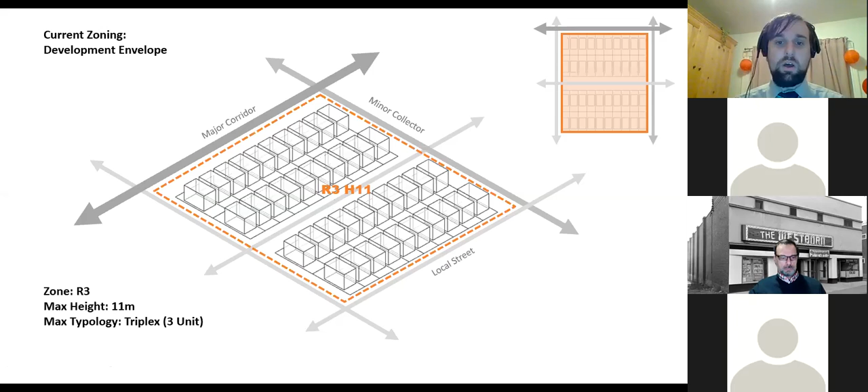So what that hypothetically means is, regardless of where you are, you can build a 3-story triplex according to the zoning, and it could hypothetically look like this. This is essentially showing what that zoning envelope is. You can see there that there's no regard for context.

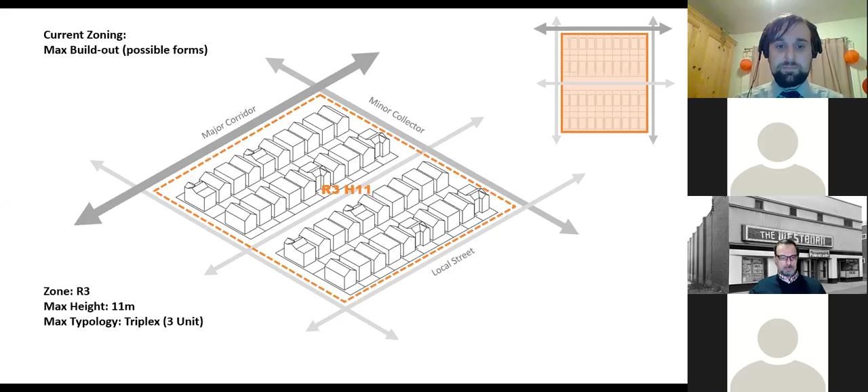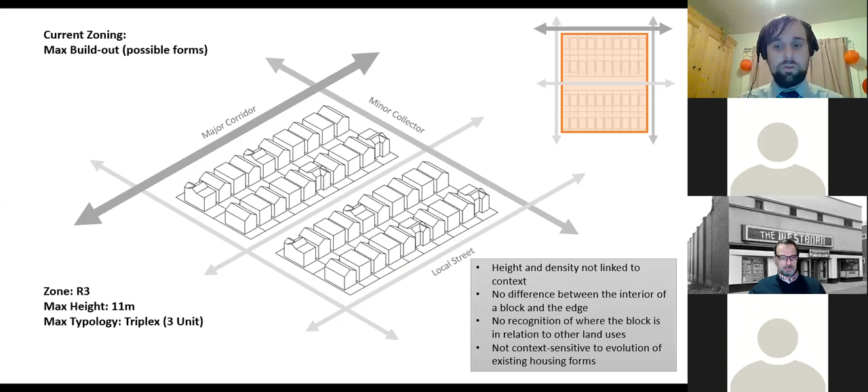It's possible that there might be some specific changes to the built form building by building. You might see a bit of a peaked roof, but generally speaking, regardless of the context, it allows a 3-story triplex. So again, presently, no regard for context, no difference between being mid-block or towards the corner of a block, no difference whether you're on a significant major thoroughfare like Churchill or a local street.

So there's no regard for context there. So the major principle is essentially to concentrate the highest level of density towards edges of the neighborhood and major streets, with lower density and height in the interior.

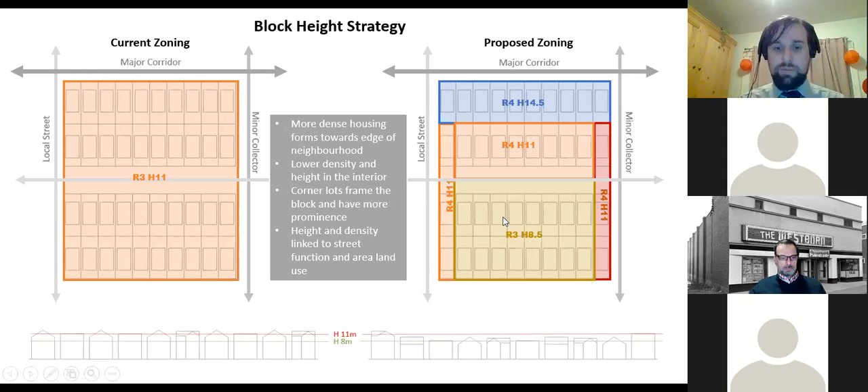So this is essentially what that model is going to look like, and I will walk you through that. Very generally speaking, if we look at that same area again, this is what you'd get. Highest level of heights towards Churchill Avenue, going down as you go to other major streets such as Byron, as well as on the corner lots and areas like that.

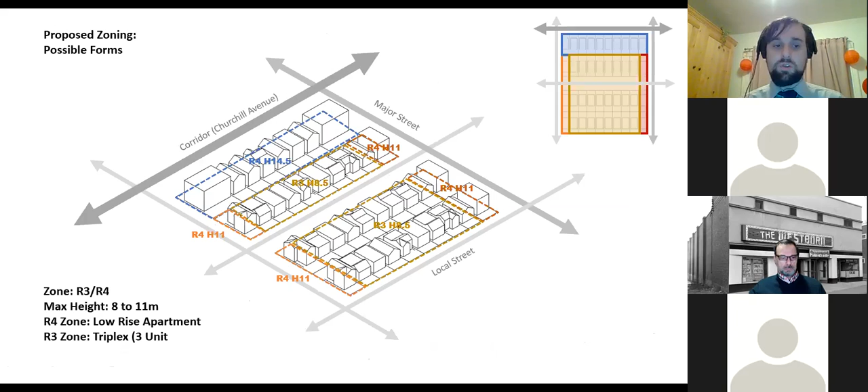And finally, when you're in the interior of the neighborhood, it would be expected to be smaller, less dense two-story forms. So again, this intends to actually take that context into account. A three-story building mid-block is not going to fit as easily when compared with that sort of thing on a major street such as Byron or Churchill. There is context taken into account and better recognition of essentially where you are and what's around you.

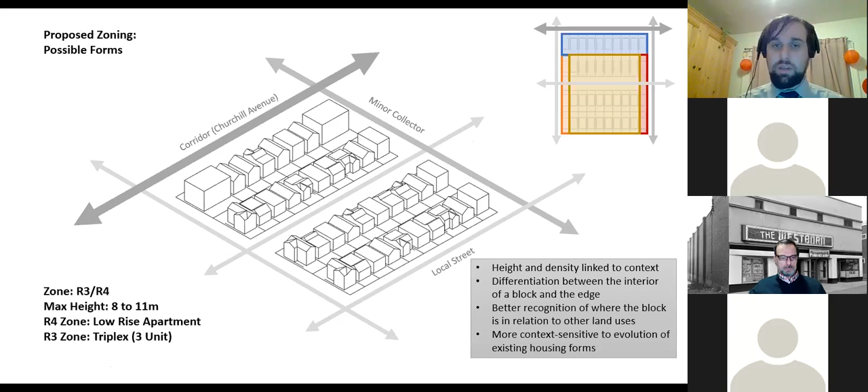So what I'm going to do is essentially walk you through each of the key areas we look at, the principles behind what we're proposing, and the actual zoning regulations that come from that.

The biggest important subject is density. It's an appropriate and desirable thing that can bring many good things to a neighborhood, like retail and necessary services such as parks and transit. But when you insert it, it's important to take care of the quality of life in that design, both for existing residents and for new residents.

When we look at major streets, we'd be zoning streets like Churchill and Byron to allow low-rise apartment buildings. On Churchill Avenue, being the most major street, that would permit up to 4-story development in general, whereas on Byron Avenue, up to 3 stories.

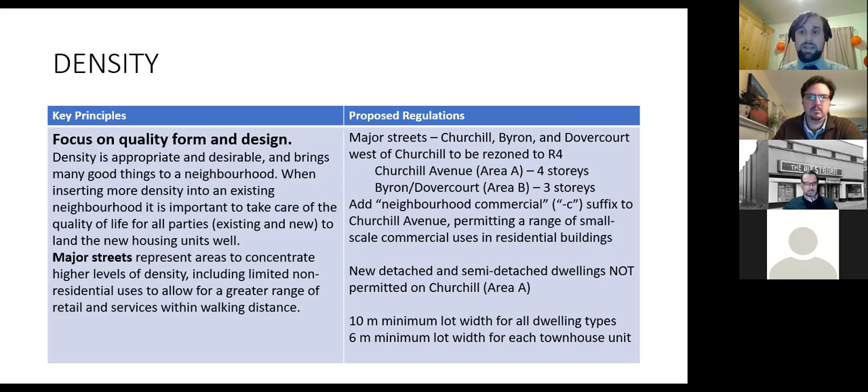On Churchill Avenue, we're looking at adding the neighborhood commercial suffix, allowing a range of small-scale non-residential services like cafes and retail within walking distance, to support the new residential density. We'd also prohibit any infill on Churchill from being a new detached or semi-detached dwelling, since the intent is to concentrate higher density on those streets. If you're developing on a major street, it should be a high density use.

On local streets, there will still be infill and redevelopment, but at a smaller scale compatible with the existing built form. That means 3-story development is permitted on corner lots and lots directly adjacent to major streets, including up to 8-unit smaller scale apartment buildings, given that they frame the block or are adjacent to a major street.

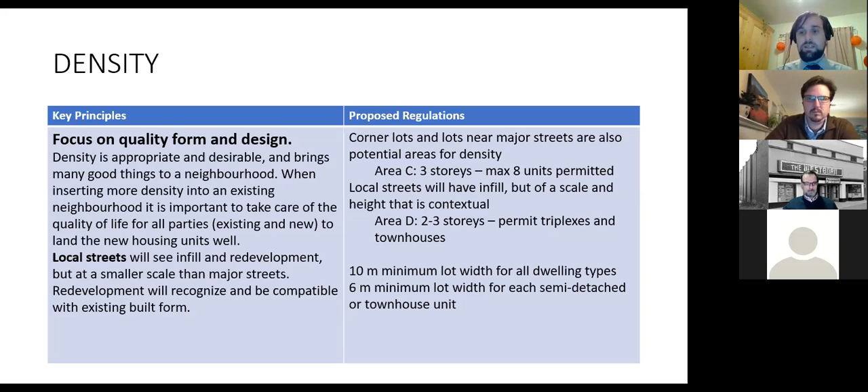Once you get to the interior local streets, height is expected to be more contextual, and uses will be limited to no more than 3 units, as well as semi-detached or townhouses, intended to reflect the built form that's there today.

Here's an example of the local street context and an existing home. A lot of them are 1 to 2 stories. New build forms will be more in the 2, maybe 3 story range with a peaked roof, and there'll be more detached and semi-detached dwellings.

Getting into the subject of height and roof lines, context is important, and height should depend on context just as permitted uses should. Churchill Avenue is 4 stories, Byron and Dovercourt west of Churchill 3 stories, but on local streets, generally no more than 2 to 3 stories.

On the interior of a block, this means generally limiting to a 2-story form. The exception is that on local streets, where pitched roofs are more prominent in existing houses, replicating that style allows a higher height. A 10-meter height, accommodating 3 stories, would be permitted provided you include a pitched roof with at least a 1 to 2 slope, ensuring that if you go taller, you're providing the pitch typical of a house form.

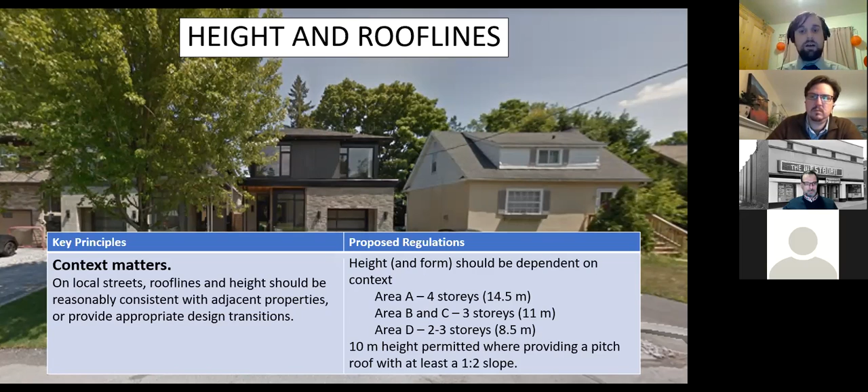So this is what that would kind of look like. On the left, picture basically two 3-story triplex boxes. Old zoning permits them to go to 11 meters, even if it's mid-block, regardless of where it is.

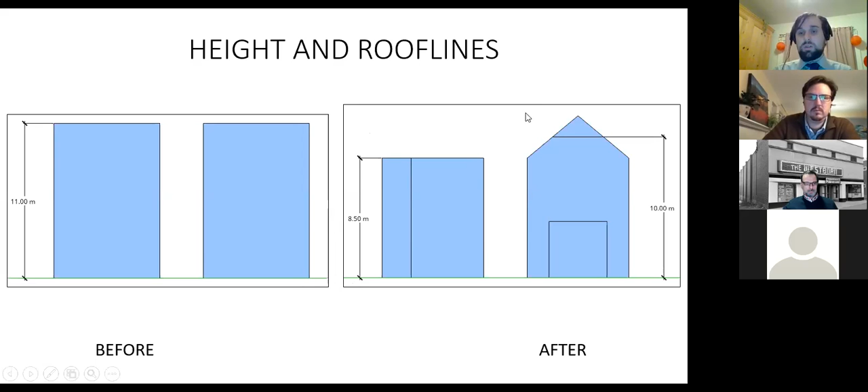What we're essentially looking to do on those local streets is, if you want to do that sort of flat roof box, you're permitted, but you have to do it at a lower height that's more typical of the 2-story form. Or you can do a pitched roof and you have a little bit more leeway.

Facades and articulation. The facade of a house or a building contributes to the quality of the community as a whole. Providing a level of articulation contributes to the public realm and adds visual interest to the building, presenting a respectful, good neighbor face.

So essentially what we're requiring is that at least a certain portion of the facade be recessed by at least 0.6 meters. This was first introduced in our R4 zoning review, and this is something we're looking to apply in Westboro to a more R3 context.

So again, going back to our before and after, this is what it would look like. Right now, the zoning permits you a box. It permits a 3-story box for a triplex, and says you don't have to do anything more than a box. Now what we're looking to do is ensure there's a little bit of articulation to break up that boxy mass.

So there is still some architectural flexibility in terms of how you break it up. For example, you can break up part of the story all the way up, or maybe have a little area forward with the rest of the dwelling back. The important thing is that there be some articulation.

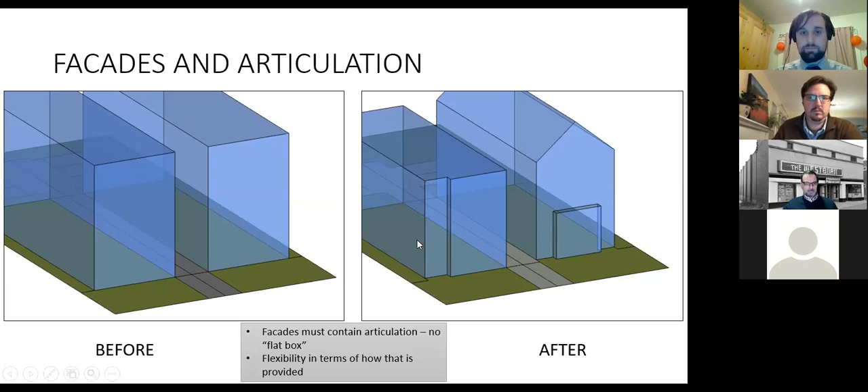Rear yards and landscaping. Rear yards have a number of functions. They provide amenity space for people, a place where people can go outside, hang out, and enjoy the outdoors. But they also provide a number of functional benefits.

For example, rear yards within a block contribute to the overall block for things like stormwater. They provide space for the mature tree canopy. And trees were, I think, a major topic raised with us by residents throughout the study.

With that in mind, we want to see rear yards on any sort of infill providing that sort of space for those sort of uses, in particular space for landscaping to retain the mature tree canopy.

That would come in the form of a buffer abutting the rear lot line. That can range from a minimum of 3 meters if it's a lot on a major street, or as much as 4.5 meters in other cases.

The purpose of this is to ensure that there's a specific aggregated landscaped area that must be provided first, landscaping first, before any of the other functions that you might have in a rear yard, such as hard surfacing, parking, or other buildings.

Another thing to keep in mind is that particularly deep lots typically involve deeper rear yards, as the building generally doesn't take up as much of the lot. So when infill occurs in these contexts, we want to ensure the form is not significantly bigger and significantly deeper than the existing rear block context.

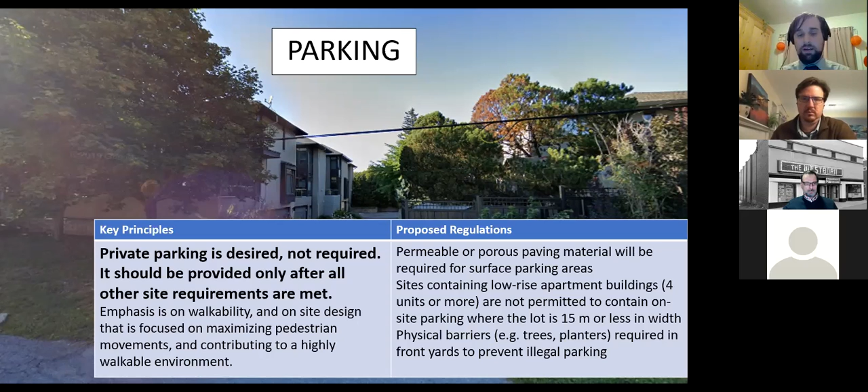Finally, we're proposing, again from the R4 review, to implement a requirement for physical barriers in the front yard, preventing illegal parking in the front yard, ensuring you retain space for landscaping and other necessary uses. Combining those two thoughts together, here's what a rear yard would look like.

On the left side, looking at our triplex box, a lot of the triplexes that have been built typically have parking areas in the rear yard. The way they're developed, this commonly becomes the main focal point of the site, turning the rear yard into a parking lot.

There may be some landscaping wrapped around it, but it's often not effective enough to allow for retention or growth of trees. In some cases, that space gets swallowed up for more hard surfacing.

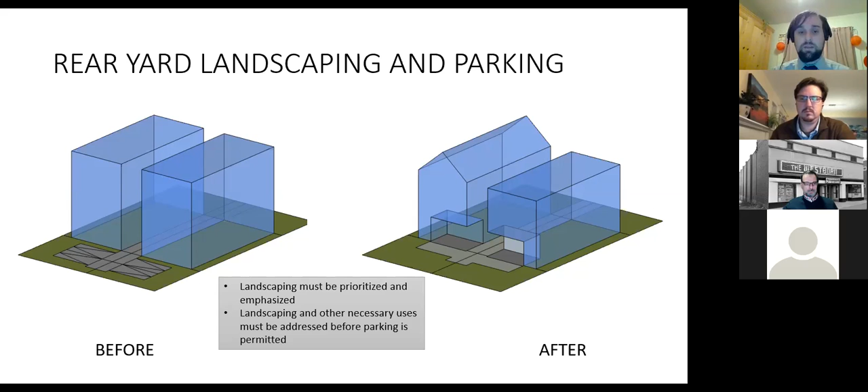So what we're now saying is you have to provide your landscaping first, along the rear lot line. If you have space left over for parking, you can provide it. But if there's not space for the level of parking you want, there's something you'll have to trade off - in this example, providing parking within the building footprint, such as inside the building in a garage. Landscaping is what has to be emphasized.

I'll quickly talk about other yards - this is the last topic within the current proposal. We do talk about front yards. These are a key element of streetscape character - the sort of face that's presented to the public.

When we're emphasizing walkability, setbacks in an urban setting are generally intended to be shorter, allowing for more intense pedestrian use while still ensuring area for landscaping and street trees in the front yard. On major streets, we're looking for a front yard setback of 4.5 meters, a little shallower than on local streets, but allowing for pedestrian connection while maintaining space for front yard and street trees.

And other uses. In the case of side yards, these are much more functional. They provide light and airflow between buildings, and most importantly, access for things like waste management, functional movements, and necessary infrastructure such as HVAC and other utilities.

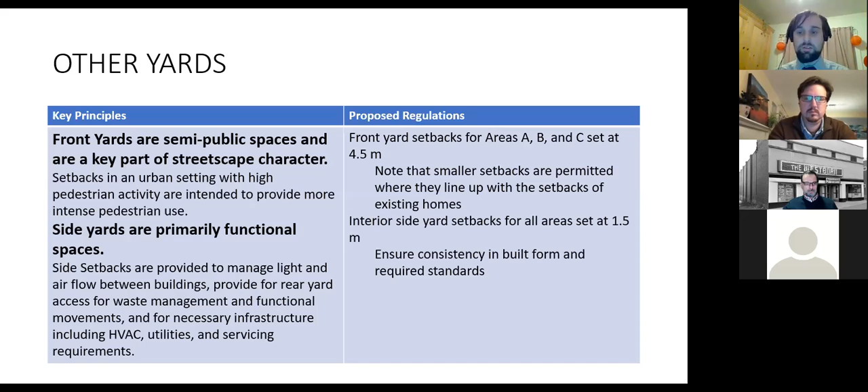It's also important to ensure consistency in built form, because again we are looking to regulate primarily the form. So we're looking to establish a consistent side yard setback, and we've proposed 1.5 meters. This is an increase for certain dwelling types - a lot require 1.2 meters, or 4 feet. We'd effectively be raising that to 5 feet, consistent with the requirement for an apartment building, where you need a bit more space due to more activity in accessing the rear yard. So 1.5 meters felt appropriate.

So I've pretty much described the entirety of the amendment. I do want to get into some related regulations, because infill is something that is occurring and expected to occur in urban neighborhoods across the city. With that in mind, earlier this month Council introduced a number of new infill regulations which apply to all neighborhoods inside of the Greenbelt, including Westboro.

A big one is we've updated our streetscape character analysis requirement. This requires that new development must meet dominant streetscape characteristics along your street. In other words, the ability to have a single wide or double wide driveway, or the need for your front entrance to face the street, is essentially determined by what everything else existing on the street is doing. You have to meet those elements of the character.

In addition, it required landscaping first. We're proposing in Westboro to require that first in the rear yard, whereas the infill regulations more generally require it in the front yard, in the form of a minimum aggregated area, essentially to ensure space and soil volume for street trees. It also restricted maximum driveway widths, essentially to ensure that landscaping is provided first.

Another couple of things - we are in the midst of developing urban design guidelines for infill. These will be more guidelines essentially dictating what sort of form and design elements we'd expect to see in low-rise infill, which we're looking to bring out sometime in 2021. Finally, we've updated our urban tree bylaw, coming into effect in January. These include new rules for tree protection and planting, geared more toward infill situations, with a bit more teeth for issues like tree retention and tree planting.